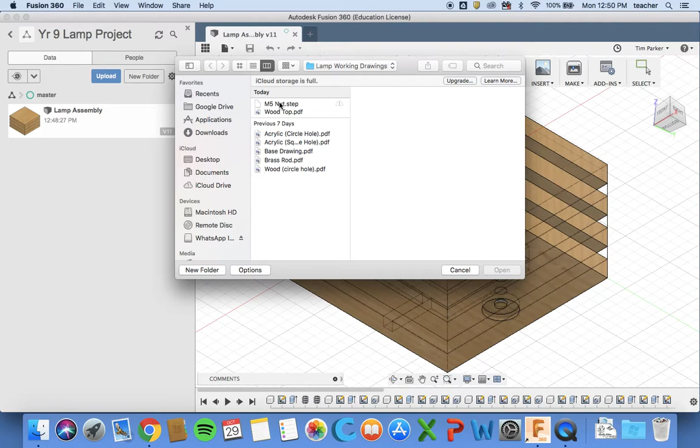There's actually standard components already on Fusion 360. Your nut that you need to import is in the shared folder with all the drawings in it. To do that, go back into your data panel, click upload, select files, and choose wherever you've downloaded the file to - it's the M5 nut step file. Click open and upload, and it will now upload this file, so this is already a 3D CAD file, into your lamp project folder. So that's a component that you can now use.

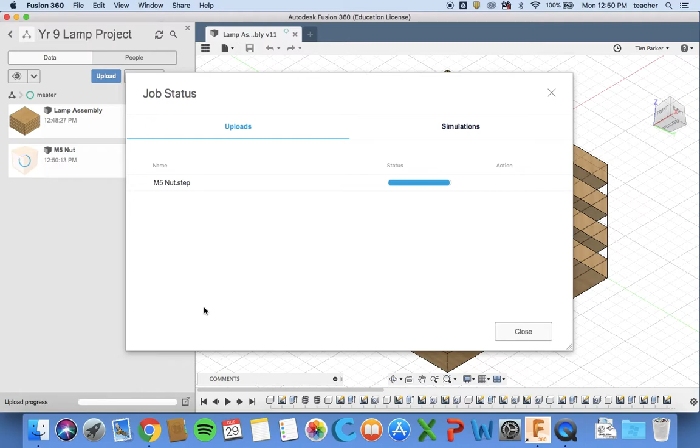Okay, so it's now been uploaded. Now what you're going to do is, if you select that, right click and insert into current design, it will now bring the nut into your design as a component. So you'll see it's been added on to the bottom here.

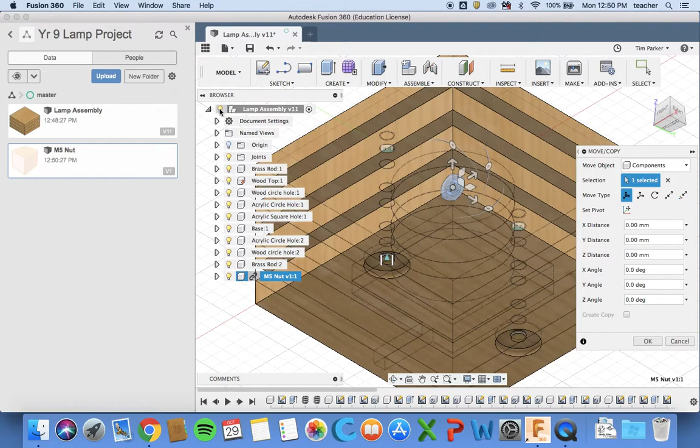Now at the minute, that's not in the right orientation. We need to turn it 90 degrees. So, I mean, you could turn everything off, apart from this, and you'll see that we can actually adjust this. So figure out which one it is that you need to turn. So if I go back to here, turn these on again, we'll just get rid of some of these.

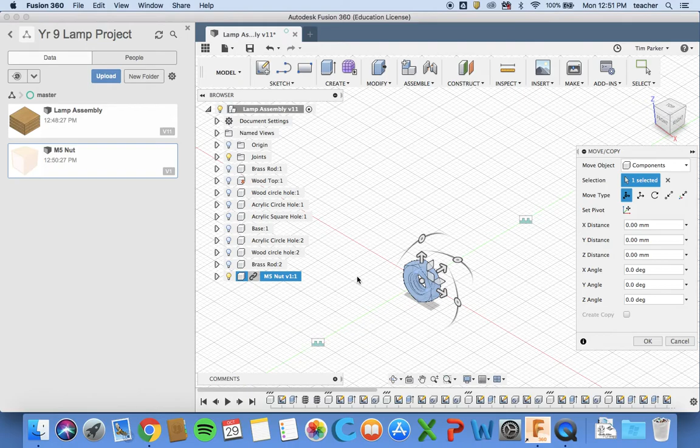Okay, so we need to turn it this way by 90 degrees. Hit enter. And then you're also going to make a copy of that, because we need two of them. So create copy, and probably want to drag it out to here.

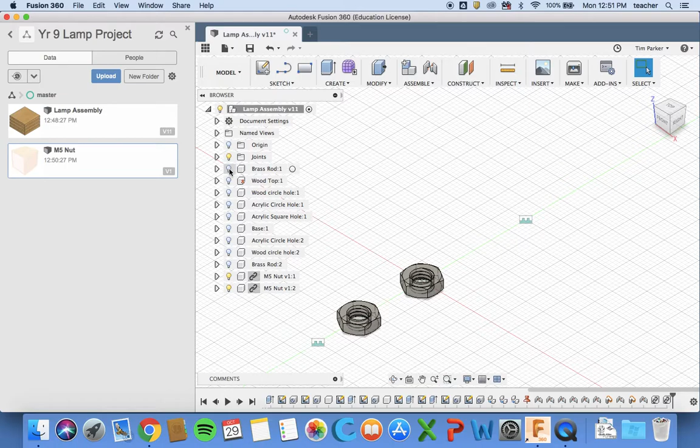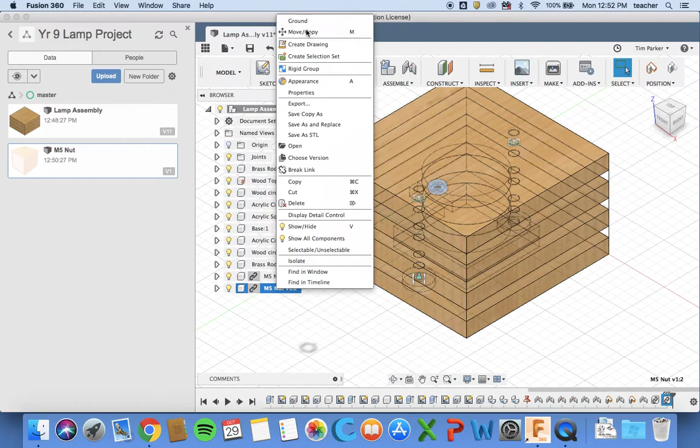Okay, so now we can turn everything back on again. Actually we probably didn't want to turn everything back on. Let's just move these. So if we right click, move, and drag it all the way out. So it's out here. We'll do the same with this one. We'll right click, move, and drag it all the way out here, just so you can see it.

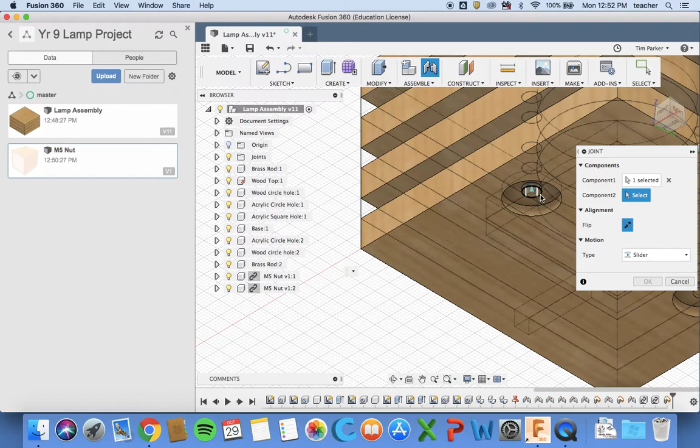Okay, so final bit, we're now going to assemble these. So we're going to go to assemble joint, capture position. We're going to choose this inside edge. And same as we did before, you need to look on the underside. You're going to choose. Okay, and you can see it sliding on. Obviously it wouldn't slide, it would screw on.

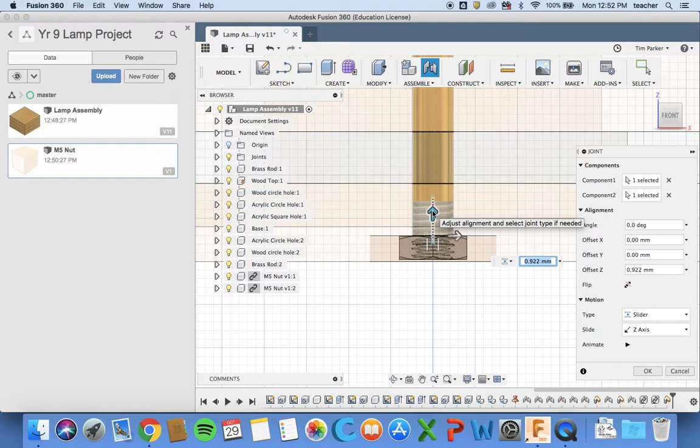Return to the sideways view, and that's going to move up so that it's touching the top. So what do you reckon this is going to be? I think probably 0. That's going to be 1 millimeter, I think. Yeah, perfect. So move it up by 1 millimeter. Hit enter. And that is that one in.

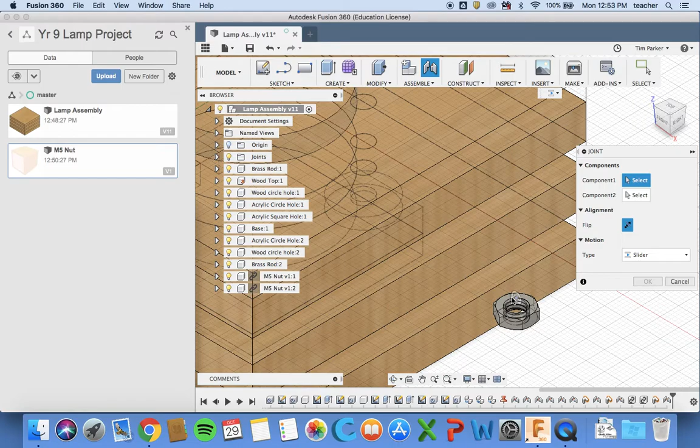Now I'm going to do the same with the other one. So we're going to choose assemble joint, and pick that inside circle, pick the underside. Okay, and then again, you're probably going to want to look at it from the side. Move it up by, I think, probably 1 again. Yep, so 1 millimeter. Hit enter.

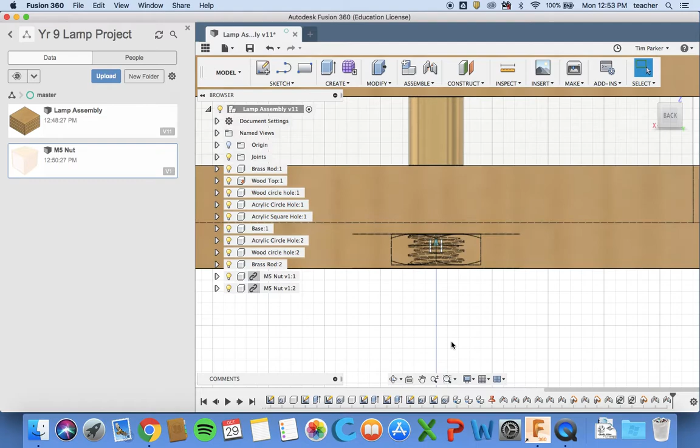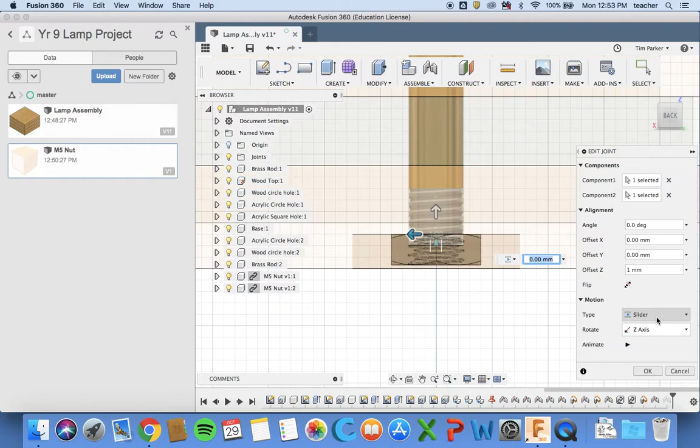And those joints, you might want to put those as - so if we edit this joint, again on the timeline, edit joint - rather than it being a slider, this could be a revolute. This could be one that basically revolves. So that's probably a better one for that. But okay, we do the same with the other joint. That was revolve. Okay, this is your timeline, by the way.

So if you go back in time here, you can see all the things disappear from before. And that is it, everything is assembled. We can now go back to here. We can change our display settings to just shaded. You can see what it would roughly look like.

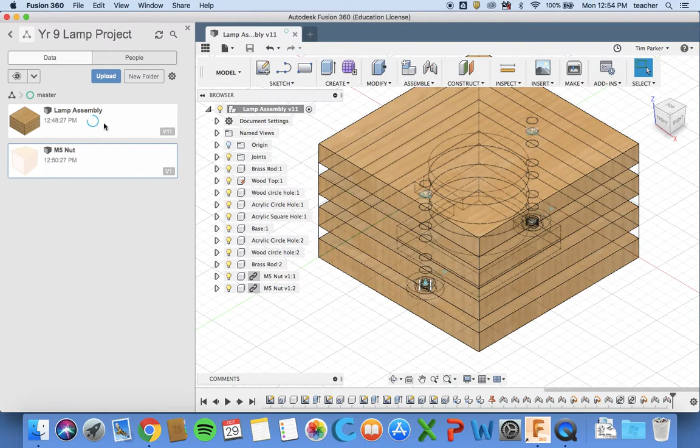Click save. Okay, now you need to make sure that you give this time to sync, so you can see the little blue bit turning. You need to make sure it syncs, because it syncs on the cloud. So if you just quit the program quickly or close your laptop, it might not actually save it onto the cloud, in which case you have to do everything again. So just be wary of that.